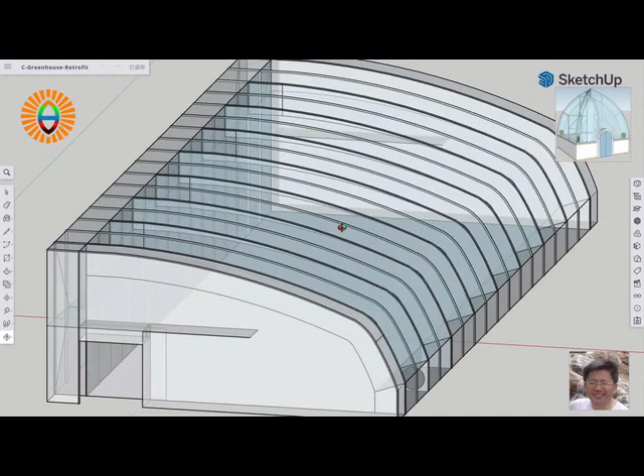So today we are presenting a retrofit. This is a design we don't want to do, but because of something that happened, we see the need to do it. Anyways, by looking at this structure, you can recognize...

This resembles the so-called Chinese style passive solar house. This is simply a profile we grabbed from a video, to demonstrate how, if this is an existing Chinese greenhouse, to retrofit it—how to use the exact same structure, and then incorporate the solar roof technology into this structure. So that's what I'm going to do today.

Before I can explain how the whole thing works, I'd like to go to a website to show how the whole thing started. It started when I'm using this one, because I haven't made the English page for this project yet.

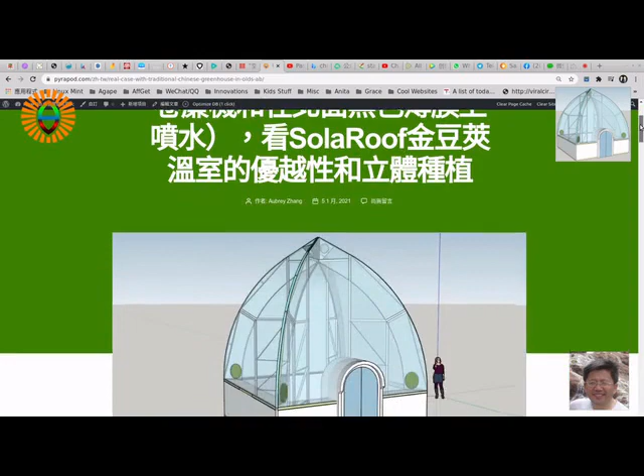Basically, this is a case study studying two cases. One is from this guy, this gentleman, his name is Dong Jianyi.

He set up a greenhouse in Olds, where he lived. He has apparently a farm there, and he set it up and started to produce lots of vegetables and sell vegetables in Calgary. By the way, I came from Calgary, I lived there more than 20 years, so I know Calgary's weather has lots of sunshine.

In Canada that's called sunshine Alberta—lots of sunshine, but very cold in winter. So basically he explained how to grow vegetables in Alberta, very cold, could be minus 35. He explained how he started. So this is the video, okay?

So anyway, someone found out what I'm doing with the greenhouse, and they said, hey, someone else already did it, right? It's working, he's selling his produce.

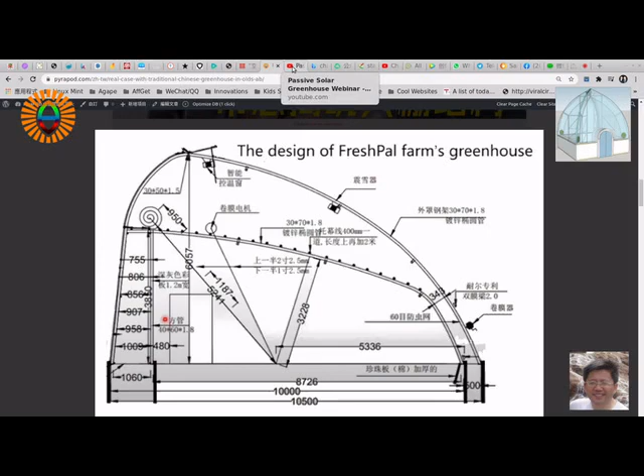But before I get into the actual retrofitting design, I'd like to explain and show the performance - how his greenhouse performs in comparison with the PyraPOD and SolaRoof design. For that I'd like to go back to his video, and we simply go to this.

Okay, for this reason, we simply go to his video and show the temperature profile, to see his greenhouse performance. This is very good, very clear, and apparently he recorded at least 3 times a day - one early in the morning, then one in the middle of the day.

Roughly, I think it's 2 o'clock, and then after sunset. So basically, for each day there's at least 3 data points - 3 temperatures. The blue one shows the outside temperature, jumping around. And the orange, red shows the interior temperature - temperature inside the greenhouse.

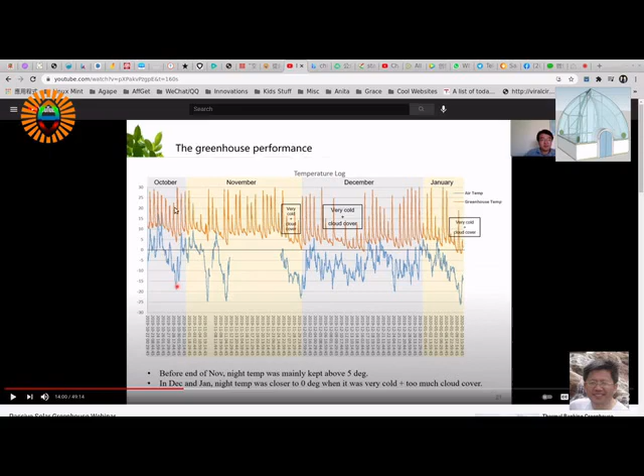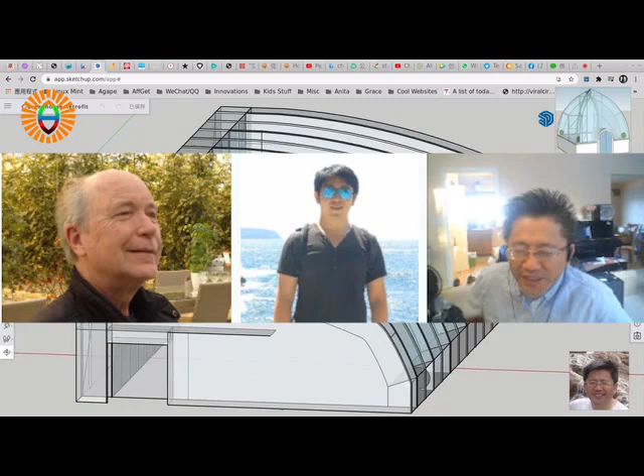How can we, taking the structure, this is the structure, right, that we the Chinese use? Or some people here import it from China, they get the structure, and then they build the rest themselves, or even get the covering.

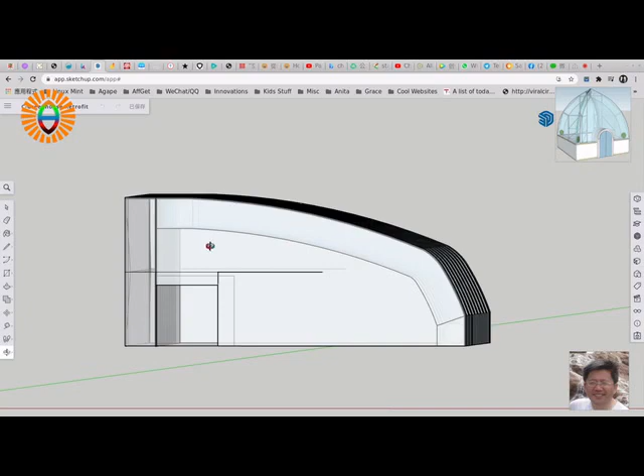But what we're showing is, based on the structure, in a case when the existing covering fabric deteriorates and you want to replace it, you have to remove the whole thing. That's the moment you should consider using the backbone, and that's simply the best moment to incorporate our design into the structure.

I'll quickly explain how it works. Actually, very simple, very simple. If you truly understand how it works, then you'll be amazed at how come nobody's doing this, or nobody's showing how to do this.

So basically, we divide the whole greenhouse structure into two sections. One is the arc, the south-facing arc, like this type of profile - this is one section, we call it the south-facing panel. And then the rest is another section.

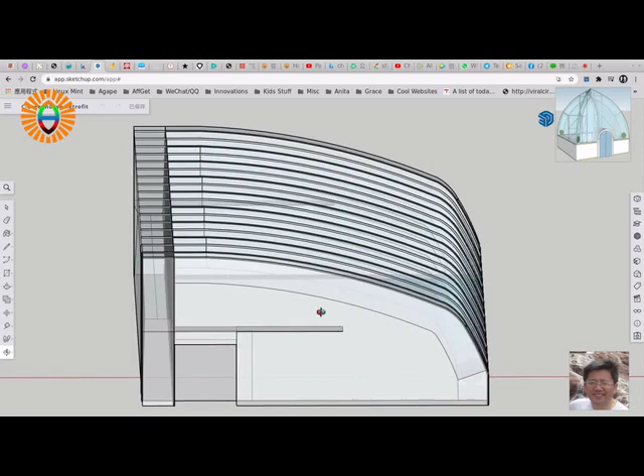For the rest, this is the north wall, this is the west wall, and the other side is the east. In this design, we make the door on the west side. You can change it - you can put it on the other side, or put two doors. That's okay, but in this design we only show one.

The fans, the bubble production, just from one section, just from this place, is enough to make enough bubbles to push around and fill the entire three-side section - the envelope. As you can see, the holes for the fan are here, so the fan will be on the right hand side, and they blow air inside.

This is simply like a duct, a channel, and then it creates a pressurized space. And then we see this screen - this could actually be the entire surface of this slope. It could be a screen, or you can drill some holes - one, two, three, four, or three, or four.

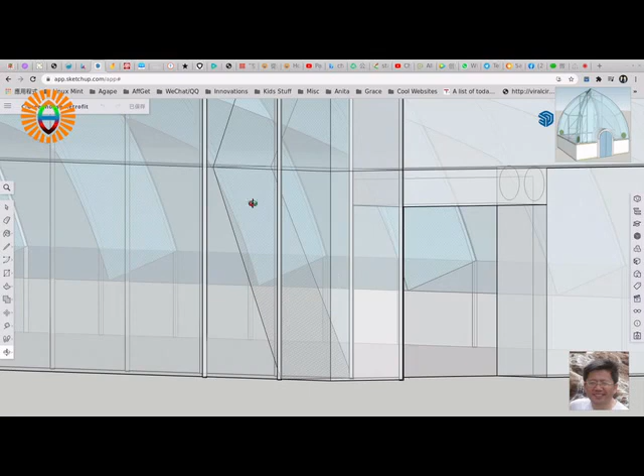That's the detail. And then you simply place the sprayer over the top, and spray the soap liquid solution to cover the screen. Because this is a pressurized space, the air will push it out, creating the bubbles. So the bubble blowing takes place on this plane.

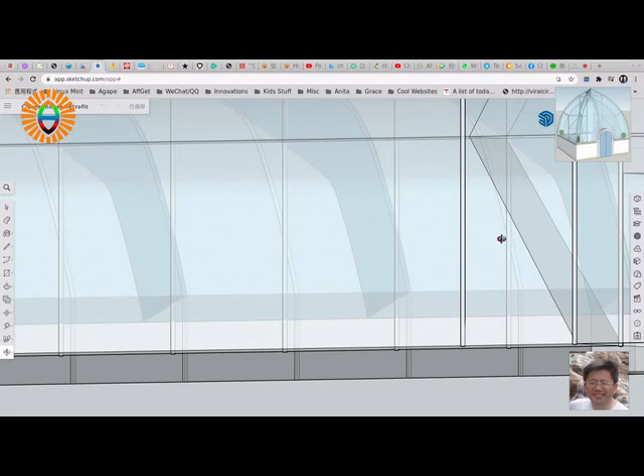So the bubbles are produced here, and fill this area first, and then the air continues to blow in, blowing lots of bubbles in here, so it pushes the bubbles this way. The bubble will flow along the north wall, the lower part of the north wall.

So the bubble will push along the way, going this way, around the corner, and then fill this part to a point. Then there's no way to go, or there's only one way to go, up. So it's better to let the bubble go this way and then push up.

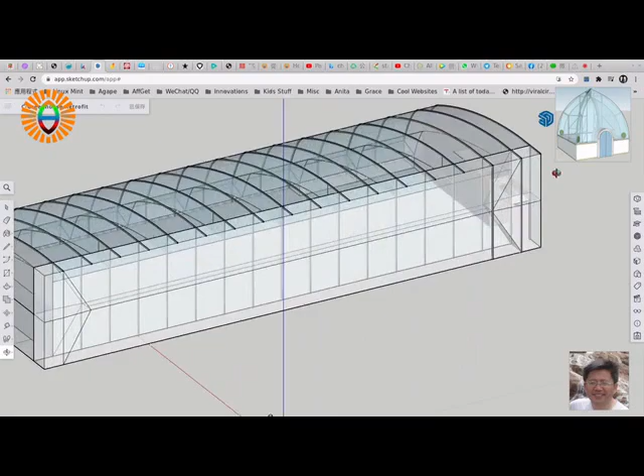And then continue to fill, it's all filled, and continue to go around the corner, coming back along the north side wall, and then go around the corner, same thing. The screen is here, the lower part, and this is the air, so the bubble will continue to push and fill this area.

There's no way to go, and they gather together here, and here there's still no way to go because the air is drawing through. So the bubble will go through the fan. Okay, this is the magic point.

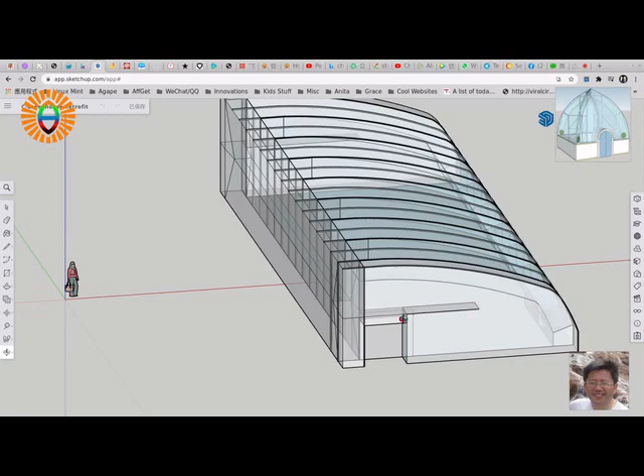This is the point where the bubbles are crushed, broken into air by the fan. So because there's no liquid spraying here, the spraying is happening there. So simply bubbles - when the bubble goes through the fan it will break it up, so the liquid and air separate, and that completes the cycle.

So this is the place where there will be some liquid gathering, and this is the place too. We're gonna give you the detail - the soap liquid tank, the small tank can be here, and also liquid accumulation. But this should actually be insulated because this is the air part. Anyway, that's just to give you a general idea.

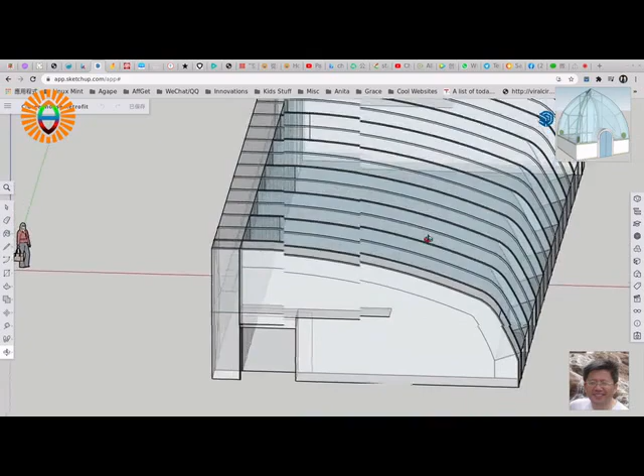So simply by design, using the existing structure, build a wall 1 meter apart. The distance is 1 meter, just to make it simple. You know, this is a big gap - you can even walk through it. So by creating this huge thick blanket filled with bubbles, we can easily create the highest insulation for your greenhouse, wrapping around it.

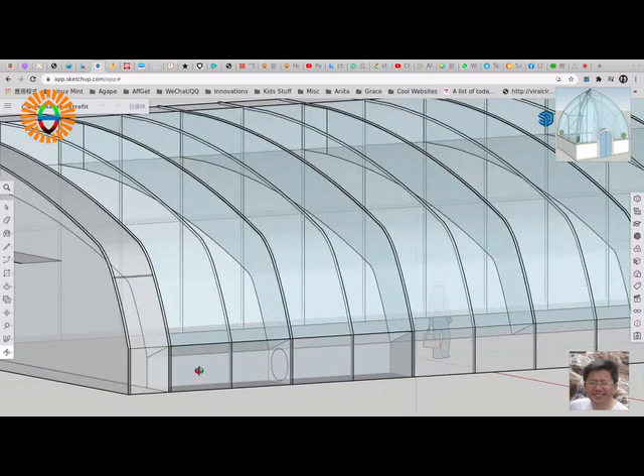And then we create a bag thing, hanging from the top, and there's a path - this is a great wide duct, basically a channel, totally empty. And so in this case, the fan will be here on the right hand side and blow air into this region, and in this region we simply use this area as the screen.

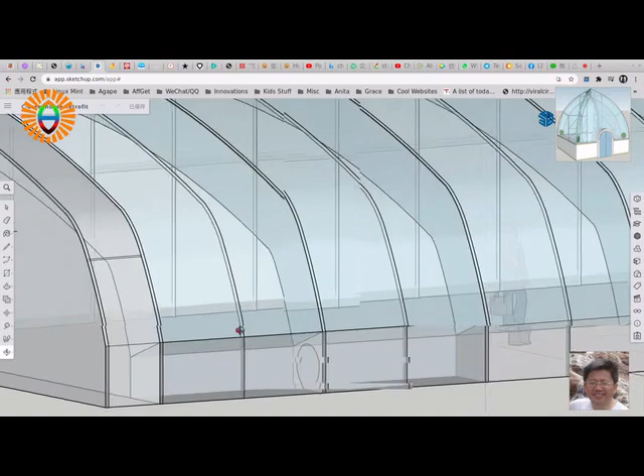We use reticulated foam to cover this, making it the screen, and the sprayer will be at the bottom spraying to the top. You can drill holes or use the whole area, as long as you make sure the soap liquid spray covers the entire surface - that's fine. And then you can blow bubbles, so we can imagine a lot of bubbles will be produced here, and the air will blow them up.

More bubbles are created, then they squeeze up, and when they reach the top, they fill the entire area. Remember, I showed in the video that it's very sticky - when you make the small bubbles, they are very sticky to each other. So there's nowhere to go but sideways. There's a hole here, a square hole, and it goes sideways and fills this area.

And the liquid, some will turn back to liquid and fall down, but the bubbles won't fall down because they're sticky. They will just come down slowly like a snake, pushing down and then down to here. And when there's nowhere to go, and the fan keeps pulling air, the bubbles will go through - at the moment when the bubbles go through the fan, that's the moment you fill the entire cavity, both sections, completely filled.

So this is how it works. Then it circulates - if you don't stop the fan and the spray, then the whole process keeps going. So you see some movement by the air. That's how it is.

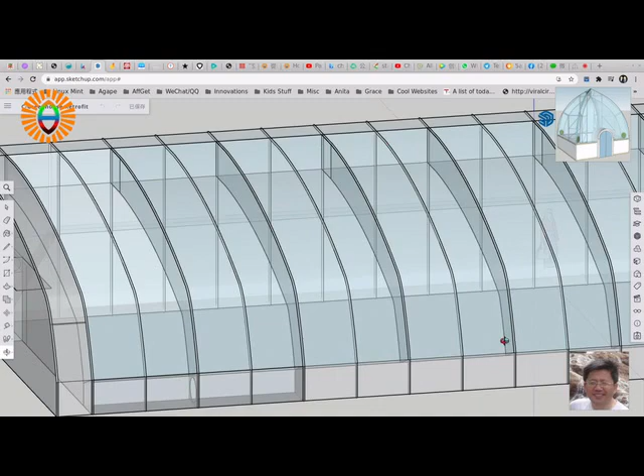And the same thing over here - we couldn't see because this is actually a knee wall. This should be in dark color actually. But anyway, the same thing happens here, just another fan, producing bubbles from here and pushing up through the hole, and going down. Same here - so it keeps going. In this case, let's see.

In this case, we have one counting pairs, right? One pair, 1, 2, 3, 4, 5, 6, 7, 8. Okay, total of 8 pairs, right? 8 pairs of channels, right? Doesn't have to be too big, right?

And it won't consume a lot of electricity, because you fill the entire cavities roughly around a few minutes only, and then you stop. Then after maybe 2 or 3 hours you need to fill again, right? So the actual time depends on how you make everything, so you can judge on site how many hours you need to refill, right?

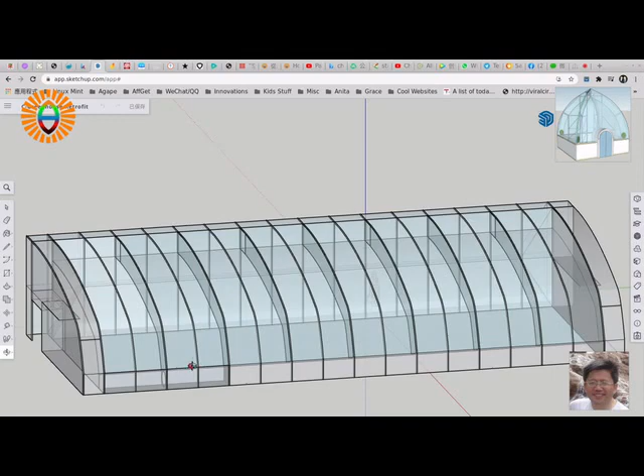So you see the fan and the pump only work for a few minutes, and then it stops. Then everything, the bubble stays there and does its magic work, to insulate the whole structure, right? So that's how it works.

And obviously in summertime there's other choices, right? If you want more sunshine coming in, for example in wintertime, you don't fill with bubbles. So when you don't fill the bubbles, the entire structure is transparent, right? And in summertime, when you see the sun going this way, very steep, and you need shade, then you fill with bubble to create shade, but it won't stop the sunlight coming in, so you still get full sunlight for growth, right?

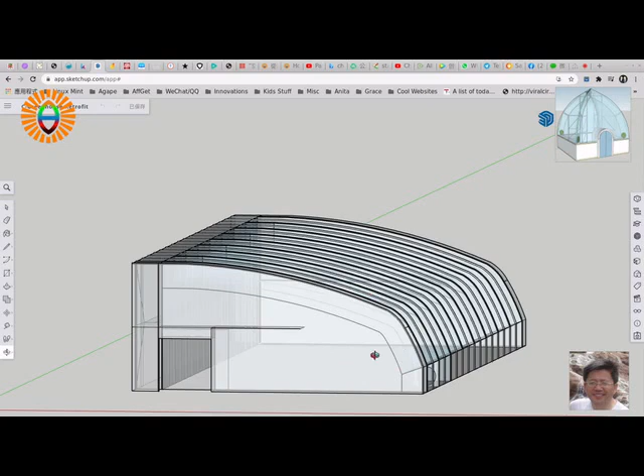But you transfer the red light, the solar thermal energy, into heat form, and store it in the liquid tank, right? So this is how you collect solar thermal energy, store it in the liquid soap tank, and then when night time comes, you simply fill the entire envelope with bubbles to stop the heat from escaping, right? So whatever heat you gather, you capture during the day, then you can use it during the night, and for that reason you don't need actual heating, right?

So this shows that this is better than passive solar. This is actually proactive solar, because we have the bubbles, moving bubbles, dynamic bubbles, when you need it, you create them, right? When you don't need them, you simply destroy them, simply by not spraying, by letting the bubbles going through the fan, and then you break the whole bubbles, right?

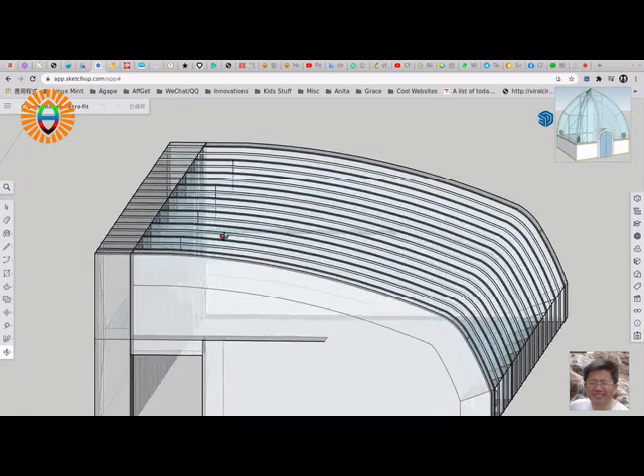And then you can turn the entire structure transparent. That's how it is. So I'm sure that once you understand this, when you see how it works, you know, right? This is so simple. This is bloody simple.

If you can't still understand this, that means you need to really think, right? You need to ask questions, right? And we like to help, and as we said before, we encourage DIY, right? If you truly understand what it is, I encourage you to build it yourself, without paying us, right?

This is why we do this. We just want the whole world to know about this technology. We want those who are handy to build it themselves, right, and then benefit themselves, right? But if you're not handy, and you want someone else to build it, you can hire someone to build it, or you can order a product from us, right?

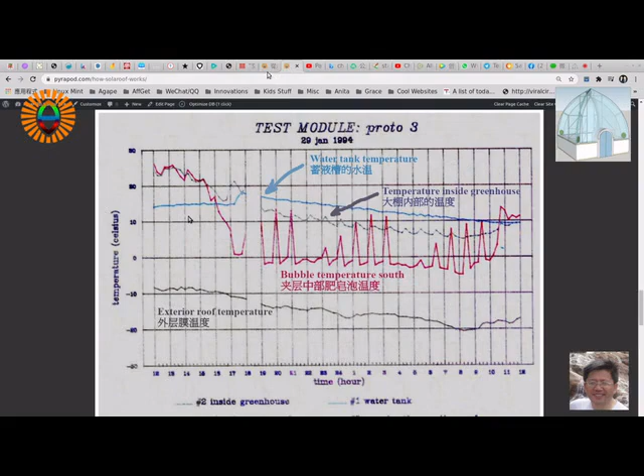Yeah, so anyway, we can show how we do it. By the way, for our own, we also have this type of structure design, right? This looks nicer, and also smaller, right? And it also fits a backyard easily. This is the one we promote.

But if you have an existing Chinese-style greenhouse and want to do some retrofitting, you can refer to this design. Okay, so anyway, hope you like it, and hope you understand. This video will help you understand how it is. And if you still don't understand, ask questions.

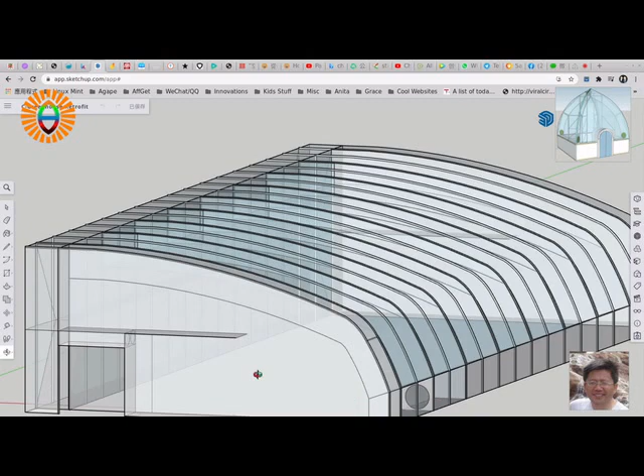Once China adopts this, they can retrofit existing greenhouses and stop producing energy-inefficient ones. That will do great work for the whole environment, because this is the cheapest and most efficient way to use free solar energy. You just need a little bit of electricity—even a few solar panels can produce enough electricity to power the fan and the pump.

That's why we like it so much, and we don't hide anything. We open it up and make it transparent. It is simple—bloody simple. So if you still cannot see how it works, you need to think about it and truly ask questions. I'm sure if you truly understand how it is, most people can do it. If you still cannot, we have the product, we have the full line design, and we have this demonstrated. I think that's enough for handy people to start from here.

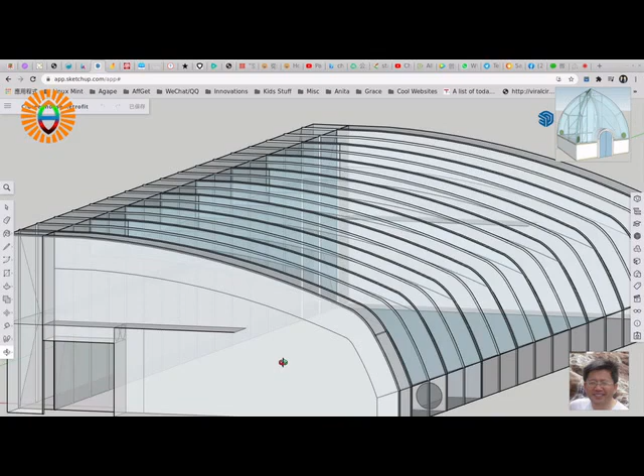Next phase we're going to build and manufacture this one, and set it up in my backyard to demonstrate it's working. At that time I'm going to set up the same thing and measure 4 temperatures, show how the plant is growing. I'm doing aquaponics and sandponics, so I'll show how the fish is doing, so everybody can see. That's our way to demonstrate it truly works, and it's so bloody simple.

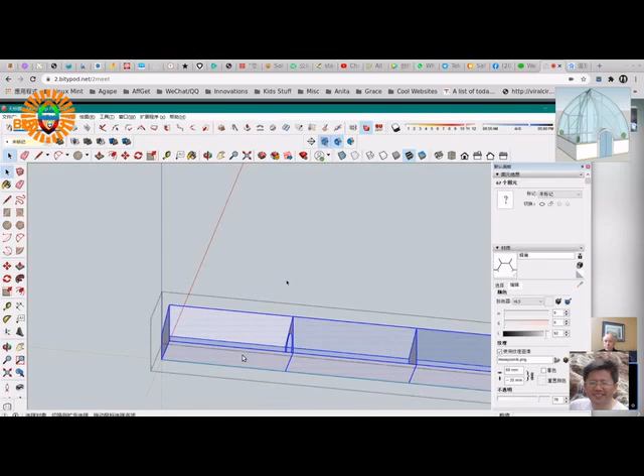So that's it. Meiji, show a screen on the left hand side, and this side, the right hand side is open. And then the other is a hole, and then we can just stop here, and I can make a simple video explaining it. You can do that. I forgot recording—right now I'm recording.

Can we put the door on the east or west side? This side, same thing—you could put it on the north, or the east or west side. The idea is you put the door right there, and bubbles can flow away from the door. Same—then we don't have to worry about that, they're straight.

And this side, what do we do here? So here's how it goes—they flow, so there's a doorway. We put it right in the corner, so we put the doorway right against the corner, 2.5 meters high.

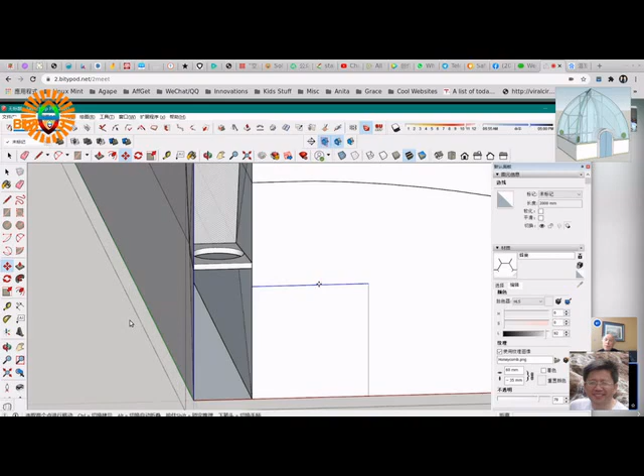And we can make it wide, just in case—make it wide. The farmer wants a wide door. So we make it 3 meters wide, 2.5 meters high and 3 meters wide, or at least 2.5 meters wide.

So now the bubbles can go, as you see, over the top of the doorway—the flow of the bubbles can come around, they don't have to interrupt the pathway, and it's a 1 meter wide cavity. It goes, and the bubbles continue flowing over the door, 1 meter deep. Really deep, 2.5 meters deep, 1 to 1.5 meters. This is really insulated—it's 1.5 meters deep and wide, and 2.5 meters deep, and it's flowing.

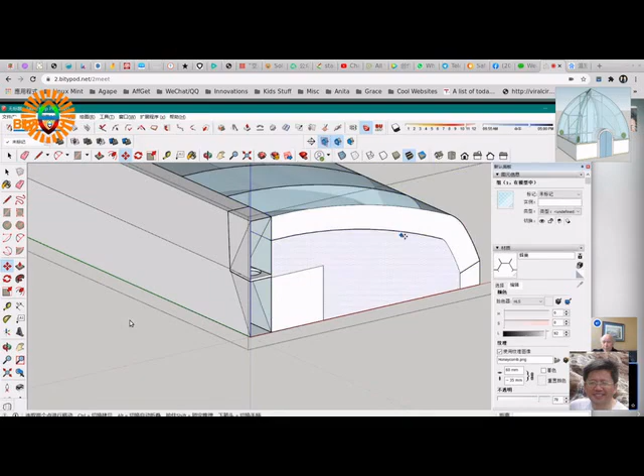And then the partition has to be designed. The middle fabric is also holding the bubbles in the top area. The middle fabric holds the bubbles in the top until we end, and then they drop into the bottom.

Right, they drop from the top into the bottom part. Somewhere along this wall, we stop. So try to think of the bubble cavity now as one big space. Remember how we did the north wall? We look at it as one big rectangle at first. So you make a big cavity on the end wall here that's 1.5 meters wide.

Just look at it from the end wall side kind of thing. And the bubbles are flowing into that cavity. Think of it as just a big empty cavity space. It's covered with the fabric material on both faces, the outside face and the inside face.

So actually, we need to make an add-on section. That's what I'm saying, that's right. We need to add like 1.5, or 1 meter. So this is 1 meter. Then we can still keep everything the same. Okay, let's do that.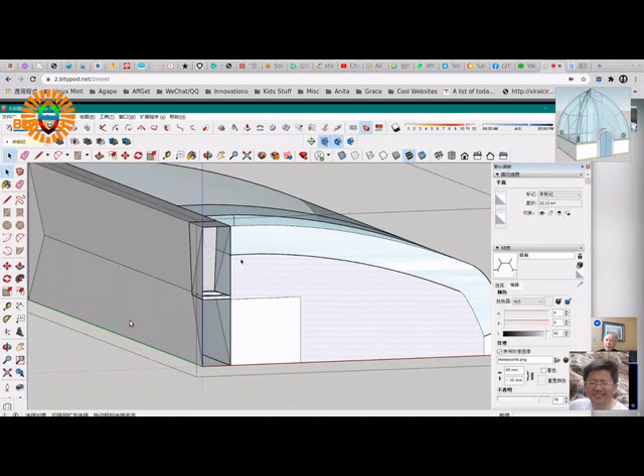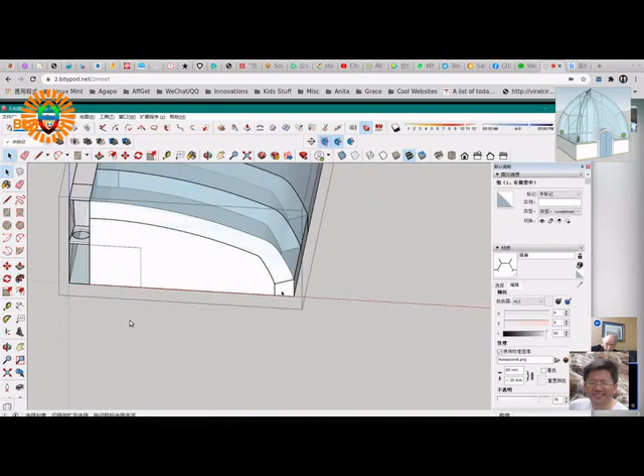Let's not go with the regular spacing of 1.5 meters, let's go with just 1 meter. But it's like a double arch at the end wall. Only 1 meter spacing, the other ones are 1.5 meters. One is going to be a second set of the metal arching at 1 meter spacing, and the outside's covered with fabric, the inside covered with fabric.

Between we have a cavity, right? And again, it's the same kind of thing. We want to create an upper cavity and a lower cavity. So we add another partition. Remember before it was 1 meter wide? The partition, 1 meter. And it is theoretically 1 meter, because we zipper it, so it comes back to the 1 meter.

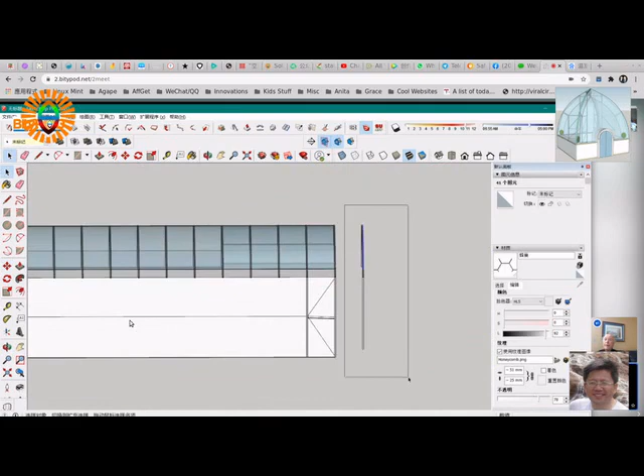Post tension, it's not something that's noticeable, except out in the span of the fabrics. When you're close to the framing, it's 1 meter, it's when you're away from the frame support that it changes. So the door is a doorway now. Yes it is, it's a portal. Through the bubble cavity.

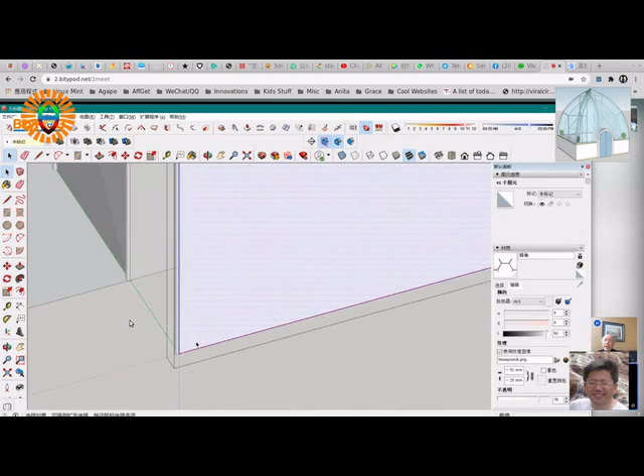So what we did for the Fairfield one, we used the door. So let's say if the door was actually only 2 meters high, we use the 0.5 meter as a channel for the bubbles to flow in the lower cavity, but over the top of the door. So the flow at the top of the cavity is smooth, it just turns the corner, it's coming down the north wall.

So Young, when do you have to go? It's at 10:10 now, or 10:30. Okay, well we'll just do the rough idea.

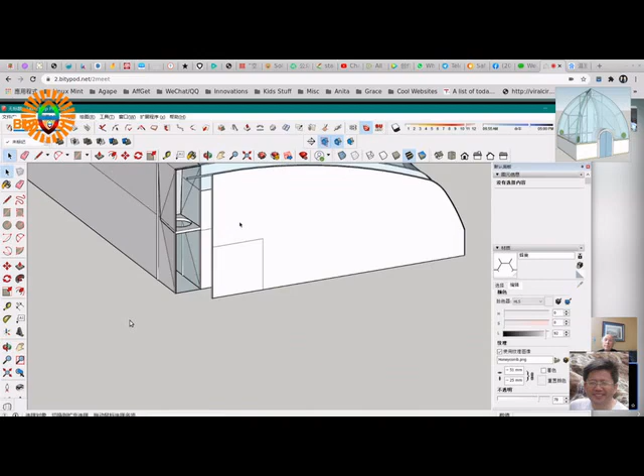So when the fan is sucking the bubbles, there's an important factor. Over the top of the door, let's make a channel. We've got that middle partition, right? The middle partition is still there.

So extend that around the corner, take that middle partition and bring it around the corner and into the end wall. So it's going across, making the upper portion and lower portion. That's the divider. So we break it around there where we won't go right to the end, of course. We break that somewhere in the middle of the south wall, the end wall.

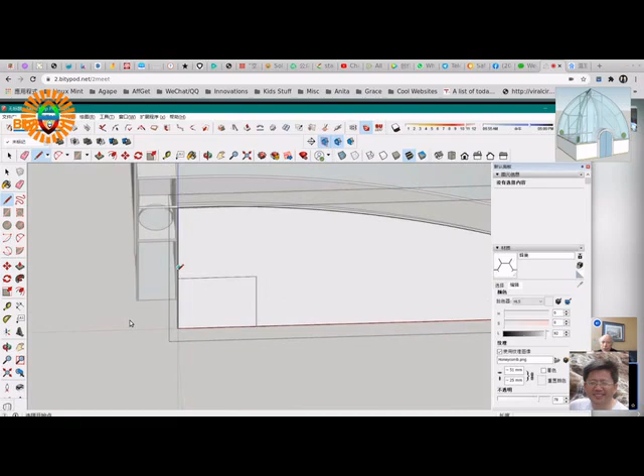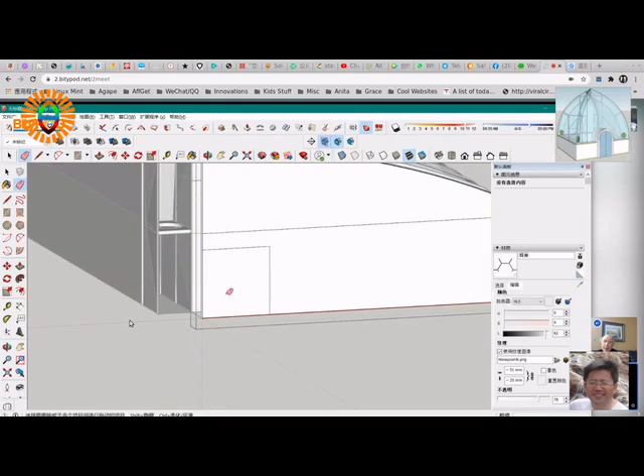That sheet's coming across there, and we stop it somewhere around there. Yeah, that's it, that's the line. So we take that and we actually extend it across, towards where the arches start to come down. So we're kind of compressing the shape.

The question is, where do we stop that sheet? We can stop it anywhere, actually. As soon as we stop that sheet, the bubbles fall. The bubbles are up at the top, and as soon as we stop the sheet, the bubbles will fall into the bottom. And because it's a U-turn, they're going to press into the turn.

So I would pull that back quite a good ways, I would let them fall fairly soon. So let's say we make that sheet, extend it out, see how wide the door is, like 2 or 3 times the length.

No, you don't break it there. That's continuous all the way around the corner. The right-hand side, that's where we stop it. We'll pull that back, give more room - meters, like 3 meters, 4 meters, 5 meters. Push it back.

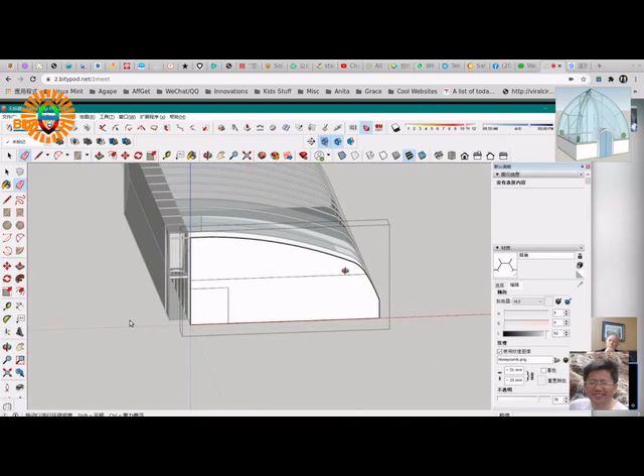Push where? Yeah, that one. Pull it back towards there. Take it back. As soon as we stop that, the bubbles will fall, right? So pull it, let's stop it way back, far from the end. Right now it's going all the way - take more. More. Somewhere around there.

We stop that sheet, right? That sheet that's connecting to the inside sheet, that's getting a top cavity and a bottom cavity. So we stop it about there.

What are the bubbles going to do? They're going to fall, right? But they're going to push - they continue to push. And they will fill in, and then they'll start to flow towards the bubble machine, towards the door, and then the bubble machine.

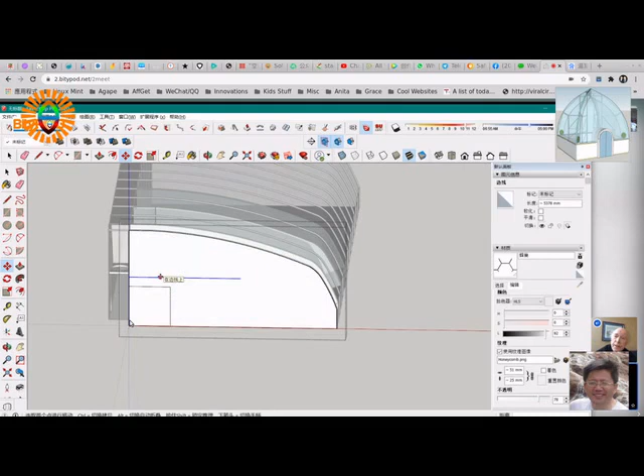And what we did is we put the fan on top of the door. If you have a portal for the doorway, and you have the sheet there - so we got 2 sheets. We got a sheet across the top of the doorway, and we got this other sheet, the partition sheet, the main sheet, that separates the top and bottom. So what you've got is a duct in between them now - you created a duct between the top of the door and that sheet.

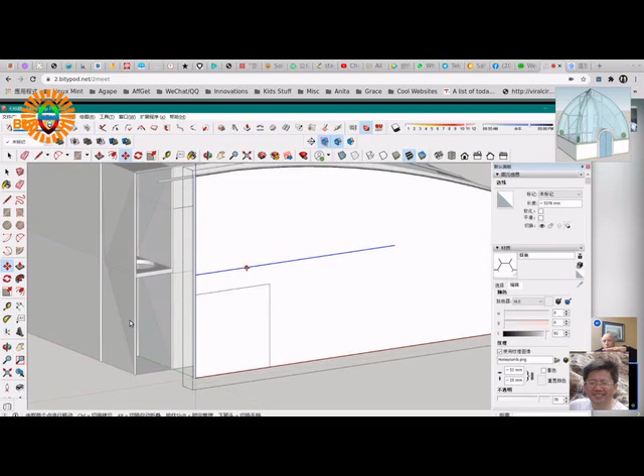1 meter by what? So we draw a round hole there. Well, that's where - look at, the bubbles no longer exist in this space.

So you mean here? Yeah, there. Yeah, that's empty space now. That becomes empty because we're going to kill the bubbles as we pull them in there.

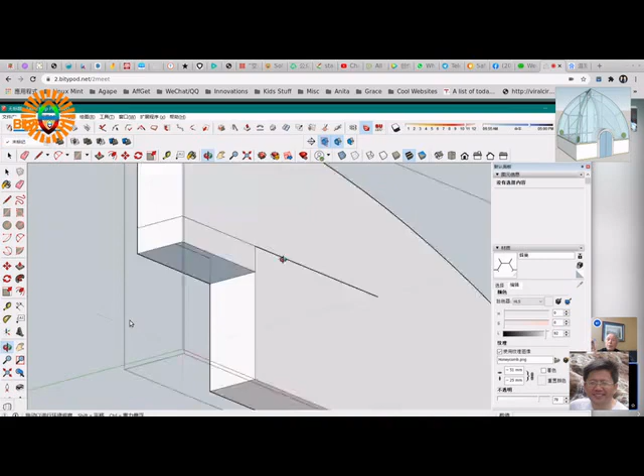So we're going to have the bubble panel, what I call the fan panel, right? Where the bubble machine is, where the fans are. So the panel now is right there beside the top of the door - not over top of the door, but right beside it. So make the end of that duct over top of the door. Yes, there, that's where the panel is - that's the fan panel. The fan is there.

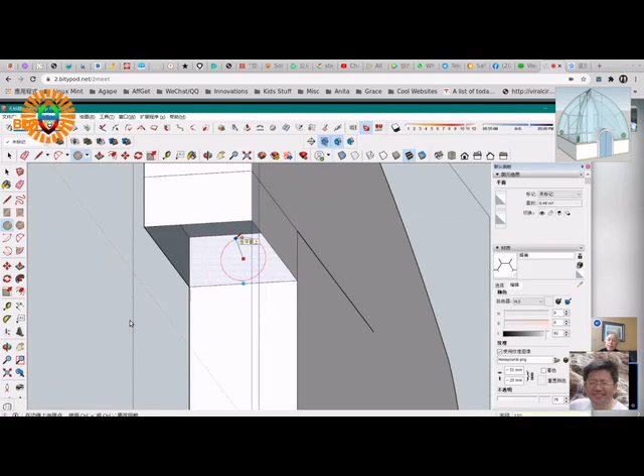And through that hole - yeah, we're going to pull the bubbles into that duct with the fan. And because we have a limited space, maybe two fans? So we might have two fan units.

Two fans side by side, two fan units, powerful wheel fan units - those ones with the wheel. Two of those, and they can do the bubble generating easily, right? Easily they can manage.

So they pull the bubbles in. So you can see we're pulling from the top of the bottom cavity, right? So the bubbles will come right up to the top there, and the air, the last bit of air, will go in when we're making bubbles.

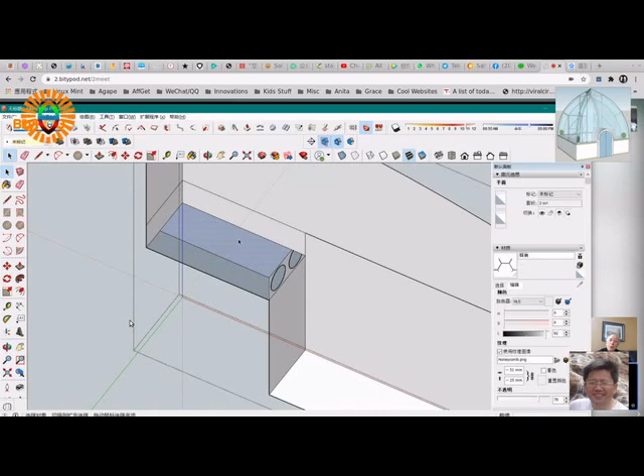And on the opposite side, we have a bubble screen. No, that's the top of the door - opposite, on the other side of the door, in the north wall. There, yeah, that's the screen.

But that might not be enough screen, so what we do is a kind of plenum for the air to get more screen area. It's kind of just beside the doorway, like a plenum where we get more screen area available, because that's cavity space over there beside the door. It's filled with bubbles, except where we have the screen. So what I'm saying is we can create a space where we have more screen area if we want.

And don't forget, it's filling the bottom cavity - all the bubbles we're making will fall downward and go downward first, filling in the bottom. Can't go above, because there's that barrier - the tie, the fabric, the partition. So let's say that's enough screen area for now, okay? But I don't think it is - we'll figure that out later, so it doesn't matter. The bubbles, as you see, will go into the bottom cavity.

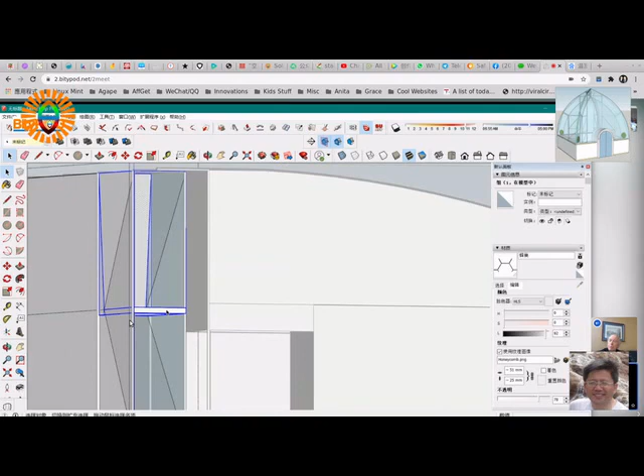Right, flowing at the bottom. We take away the bubble machine where we had it before. All of that now, we take it away. But in some cases, that design might still be valid for some situation. But now we have a different design for the bubble machine.

But the tension still works the same way, it's still there. So see that angle that we have? I have a feeling that the angle, see the angle of the skin.

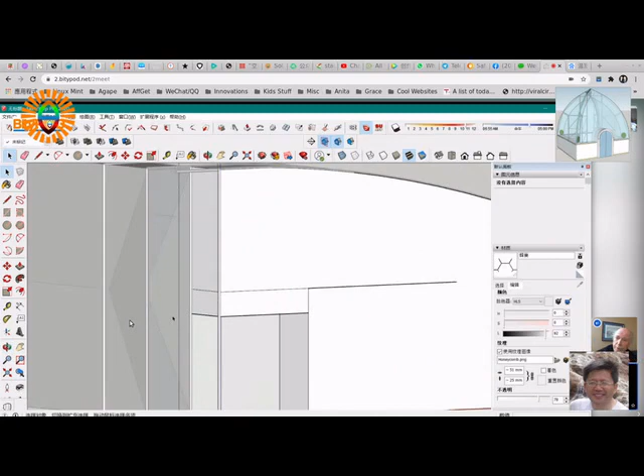Don't extrude that, we need to pull that out, right? That's just empty space, where the air can come out. And we know the air is going to exit there, from over top of the door, but it's going to exit into a plenum, what I call a plenum, which is a pressurized space.

Let's look at the end wall and the shape of the fabric there. See the shape of that fabric? See that angle, that hip roof? At the bottom, that could be where the screen is.

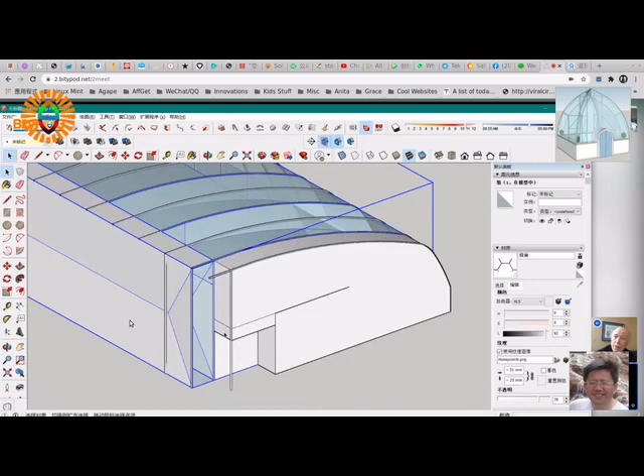You see, what we're doing is we're pressurizing the space, and we're providing a screen that the air can get through. So let's draw a sheet of material on that slope. See the slope? Inside this area, that whole slope area is a screen, or what we call the screen. What do we call it? The fan.

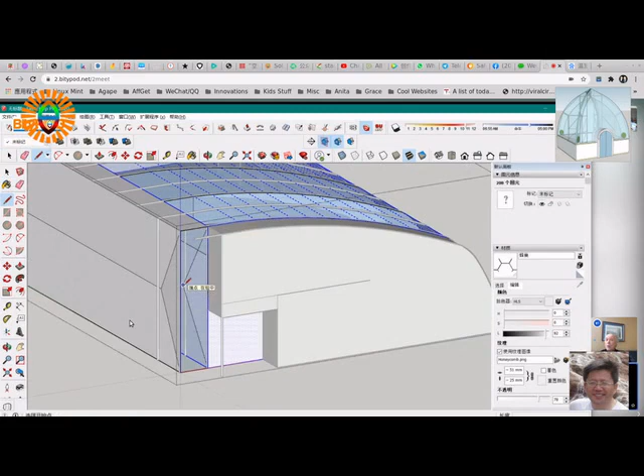Anyway, so it's not necessarily all porous, right? There's areas of that surface that will be porous, and we'll position nozzles to shoot on that surface area. So there could be a big oval area here, or a square area, or two circles, or multiple circles. Multiple circles are better, right? Just for cone circles and sprayer nozzle. So if we have 3 circles or 2 circles, maybe 2 circles is enough.

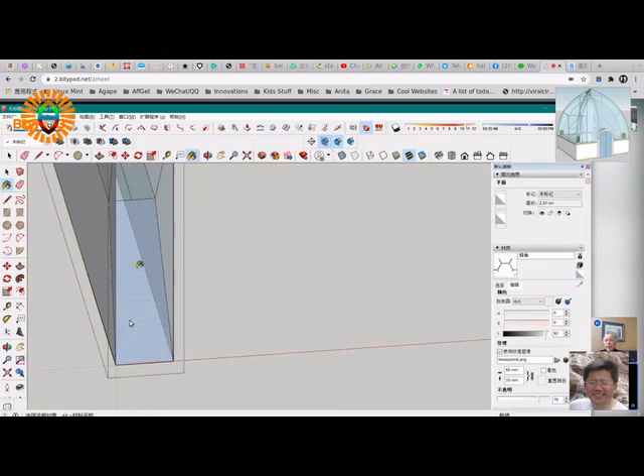2 big circles, because it's pretty big, it's a meter. Anyway, whatever, we have a nozzle shooting on the screen, covering it with droplets. And the bubbles will push along the lower cavity space.

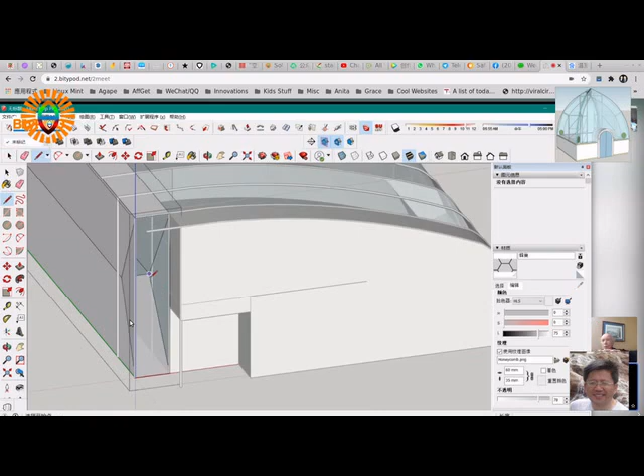And remember, there is that partition, which we can see at the top of the screen, the screen panel. So we can talk about this as a screen panel, because it's not all screen, there's an area of screen. So at the very top of the screen panel, we have the extension of that horizontal sheet, it goes around the corner, and then they stop.

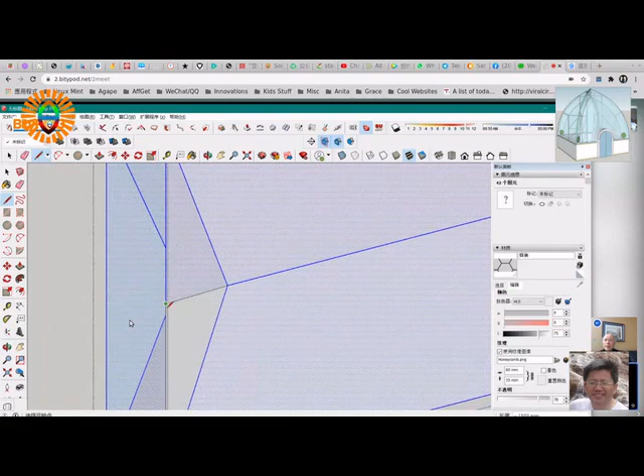It is the partition, so the bubbles or the air cannot escape from this plenum. The pressurized plenum, the air can only go out through the screen area, so that's continuous and pressure tight. So the zipper, if we have one still, but probably we don't, because we don't really need a zipper there. It's just a sheet of material that is put into this area and keeps the pressure in the plenum, the bubble generating machine.

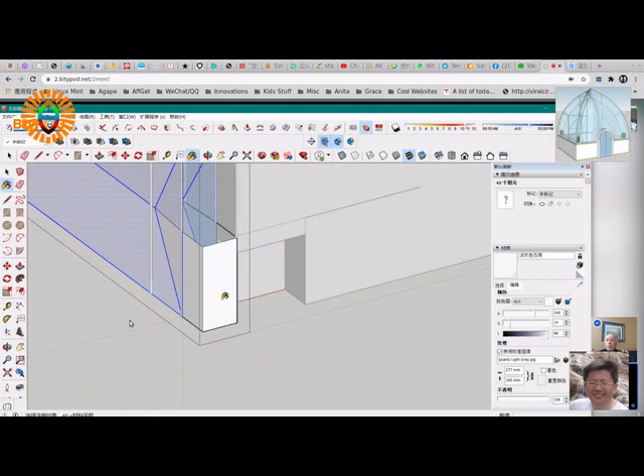So now you see that we have a door at the corner, and we'll have a corner wall system. In the corner, we're going to create an insulated wall that hides the bubble plenum behind it. So exterior to all of what we're doing right now, we build an insulated wall that covers this.

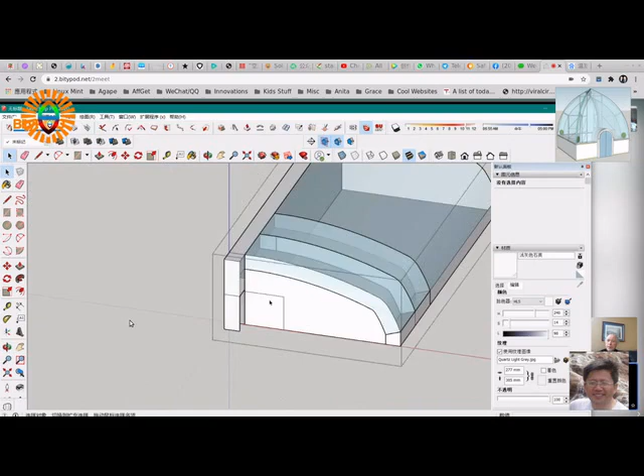So no one can see the arrangement, where's the bubble, where's the fan, where is the screen, because it's hidden in this corner construction. And we'll make the corner together with the door. And then when we service, we can go in there and do some service, because the door goes through that as well.

The portal, and over top of the door, is part of the plenum, that's a duct for the air to flow. And the air flows, being pushed in by the fan, and it's pressurizing that corner area in the lower cavity. The lower cavity space is where we're going to have the screen, so we generate the bubbles. Yep, that's it.

Oh, I got a low battery.

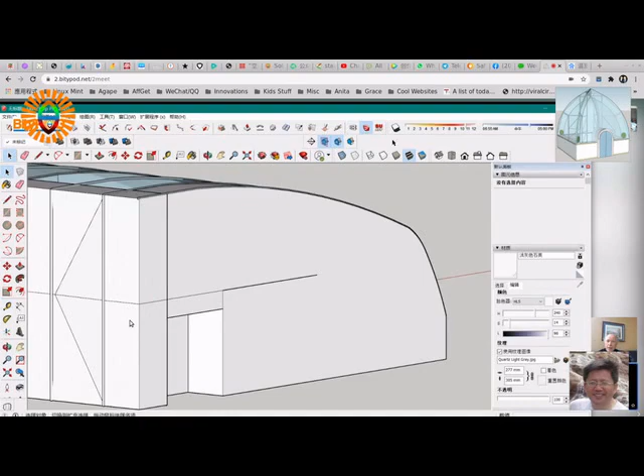We need to think about this. You know how it works - if the one bubble thing blows air, it creates a tension there. We pressurize that space. So that space is empty, right? It's not insulated because there's no bubbles in there.

So that fan could be far away, right? Yes, it can. Or maybe we can move the fans to here. It can be there, except then you're going to create more suction - that area over the top of the door will be put into real suction.

So I feel the top is where we pull the bubbles and destroy them right away, and then we're pressurizing with air. See, bubbles don't flow as well as air. So it's better to break the bubbles before they go into that duct. What we're having inside is air, not bubbles. Otherwise we're pulling bubbles and there will be resistance, pulling the bubbles into that narrow channel.

So you're saying it's better this way - the bubbles are free in the big channel to come to the fan unit, just come and flow. But if the fan is in that duct, the bubbles have to squeeze into the duct. Very hard - bubbles have resistance. Air knows no resistance, zero resistance for the air. And you also want to pressurize that space.

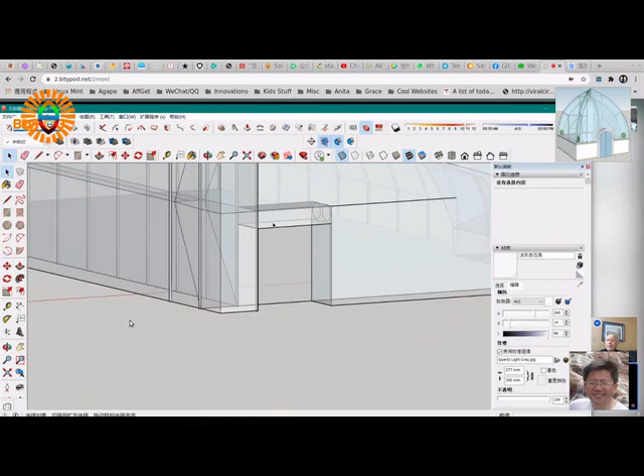So this is fine, at least this is good. Again, when you look at that Fairfield, notice that in the corners of the building, these structures we did - when you look at the video you couldn't tell, that's hard to tell. You'd say, where is the bubble machine? I can't see it. Because it's hidden behind fiberglass.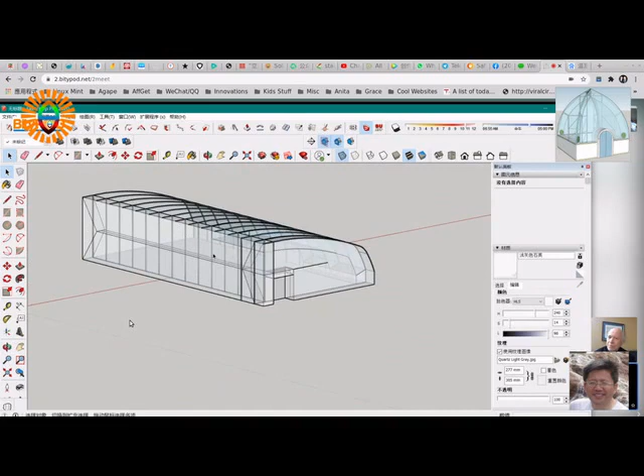No wonder - those are structures that we build. You're going to look at that and understand what that thing is - going here, going this, coming back. Wow, this is it. And we have another - what about this side? It's just a U-turn, it goes all the way around and comes back. This way, come back. Right, same thing.

If it gets too long, we can add another section - you make a break in the middle and do it toward each end. Just for this, it's just a demonstration to show the right way, so maybe just make it as a path. Just an idea, because there's no door.

No doors, so it's just two sections, same thing. And we could figure out how to do another door on this side and do another bubble machine - that would work in tandem with the other one, so they'd both push bubbles in the same direction. One would push into the bottom, and the other would push toward the top. Same idea basically.

When the bubble screen is at the top side, that's why that tower, that corner construction, went all the way to the top - because sometimes we'd need cover at the bottom, sometimes at the top. So it's a standard pushing unit there, coming back. It's a standard design for the corners of the buildings, to do the walls.

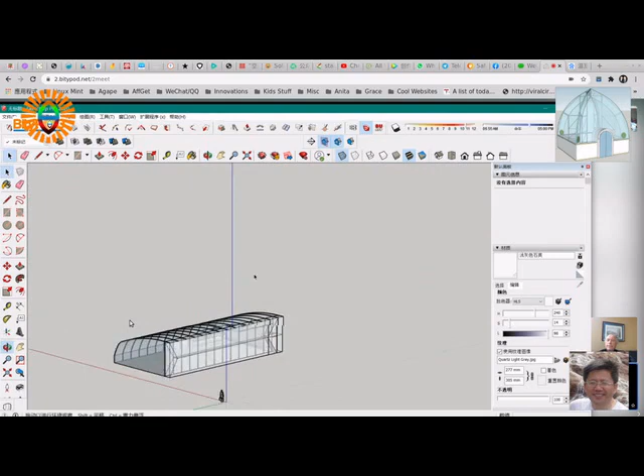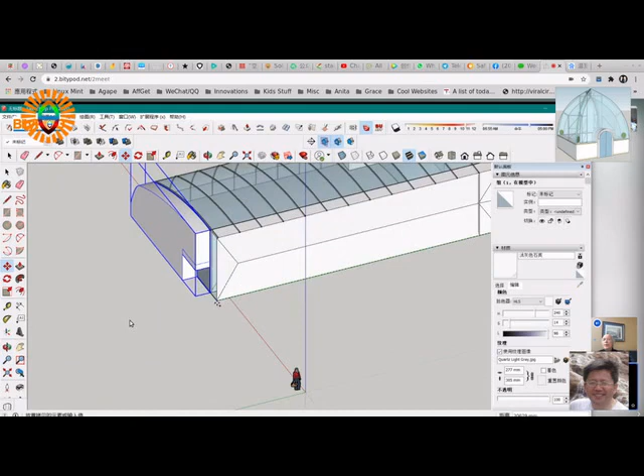But we don't have much time, maybe just show a diagram - just showing that you add a section there so the bubble comes from the bottom, going around to the other side and up, then coming to the back to the north wall, then coming back. And if we mirror this, we can do tunnels with no wall - you don't really need that high north wall, you can do a tunnel. So we just mirror this.

And we've got a south wall system and a north wall system. Bubbles on the north are fine. We don't need this idea of an opaque north wall. But this is our retrofit, for converting existing

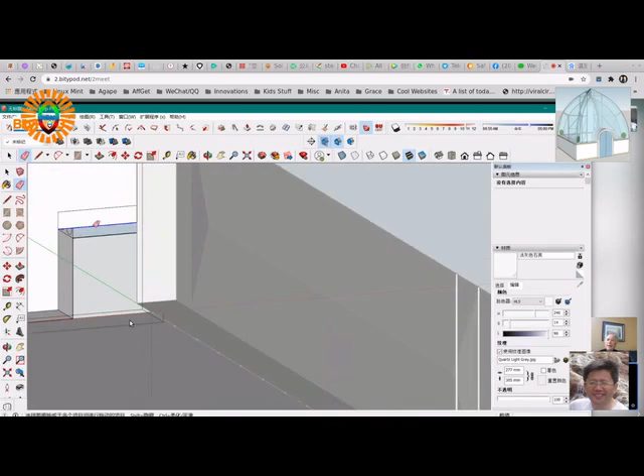greenhouse of this design. Convert them. Ooh, 2 doors. That's nice. So we just use first, maybe. Whatever. And now the screen is on the top part, and we're pressurizing towards the top because the inflow will be at the top here, somehow.

We'll work that out, but we won't do those details now. We'll work it out so that in fact here it will be generating bubbles into the top portion of the cavity.

Well, perhaps this could be a taller door. Taller door. I'm not sure, okay. It's like we're doing a lot all very fast.

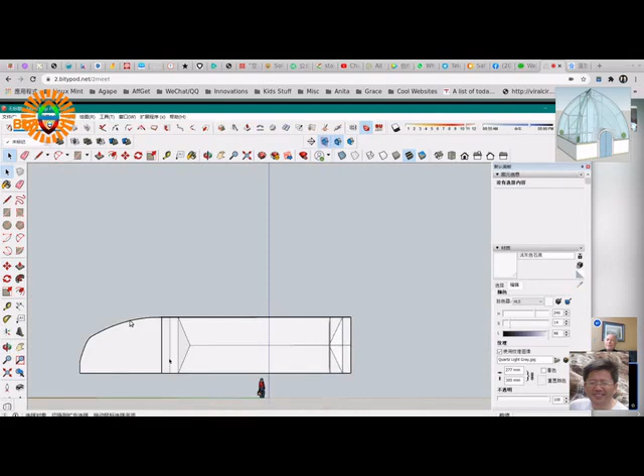Very fast. You can see that on our structures for Fairfield, we put the doors very carefully to make a really efficient flow path. For the... I see. So just look at that one again. Look at all, because isn't this great that we have that video?

Because Aubrey, you can say to people, this isn't something we imagine we can do. We have the real thing. We've done this. This is easy for us to do. And they're still using it?

Well, what happened is that because it was built a long time ago, it deteriorated—more than 20 years—they changed the cover. When they changed the cover, they put single skin on. Oh no, so they couldn't make bubbles.

Yeah, it's too old, you know. Too old. Material won't last that long. You know, the existing structure is so permanent, it's so durable.

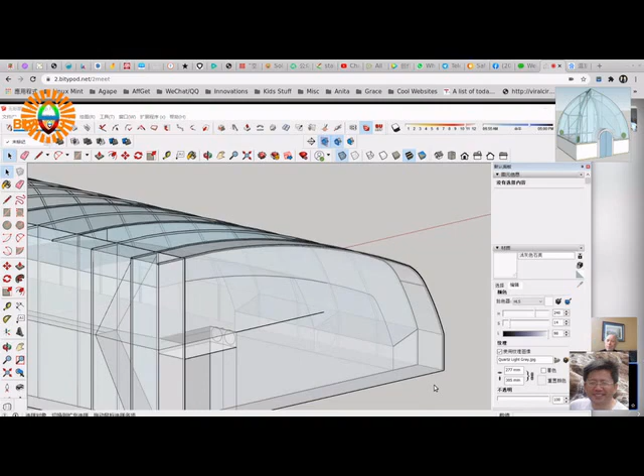We could go and put the cover system back on that structure. It worked perfectly. Okay, so a very, very little touch up, right? It's this that's over above the door.

That should be not a line, just a plane, right? Plane, and then true to right, same idea as before. That will suck in the sides, right? So it pulls them inward and makes a sort of tensioning of the skin. And it'll still work even though it's not—with this weird shape.

Wow, this is nice. All right, I will quit. You go, young. But this was a fantastic session.

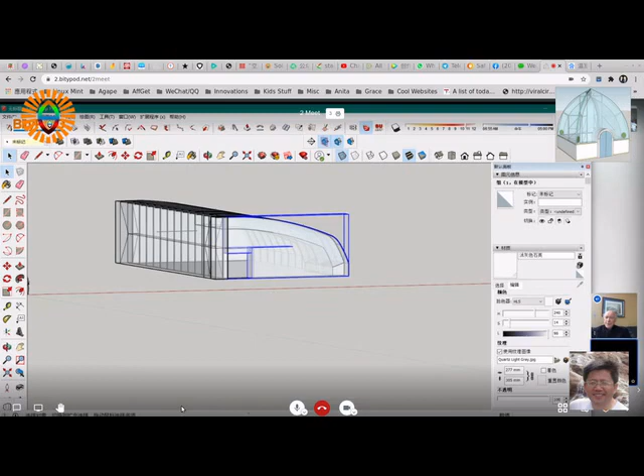Just finish a rough idea, and then I can make a video out of it. Just explain—that doesn't have to show the details.

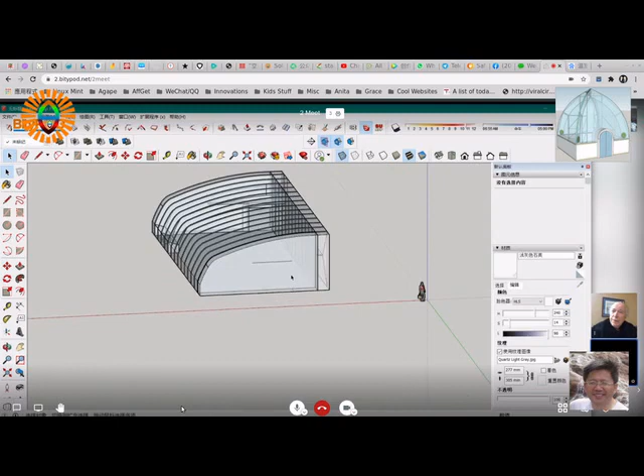Alrighty, wow, very wonderful, good, very good. So technically speaking, it can work with any shape, right? As long as you figure out your landscape, the path, the circulation. Any shape will work.

Oh, this is very, very—bubbles will go anywhere. Anywhere. And some may even, instead of retrofitting, just use the same thing.

I mean, just build a new one this way. So retrofitting is just retrofitting the existing structure, right? The other one is, they'll just build a new one this way.

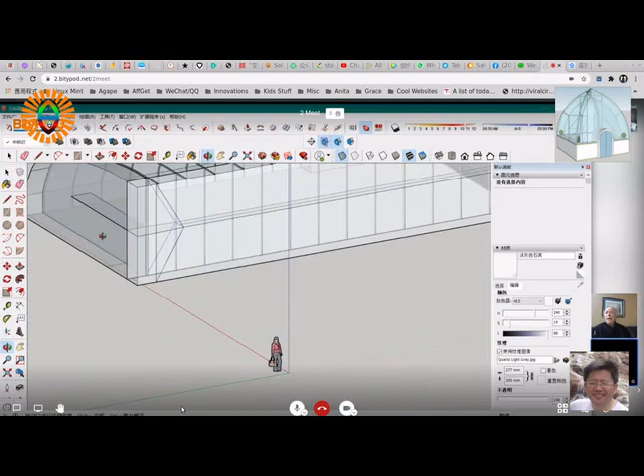Because it's in production, they can then build tunnels with a column—instead of a north wall where it is, we would have a column row. And we'd have a symmetric tunnel structure. It's very efficient, very efficient.

So roof pairs are significant, like they were working together to create the circuit, the flow path. And that also—

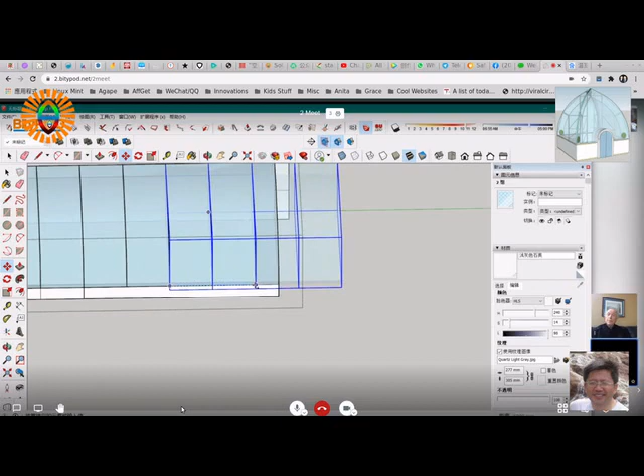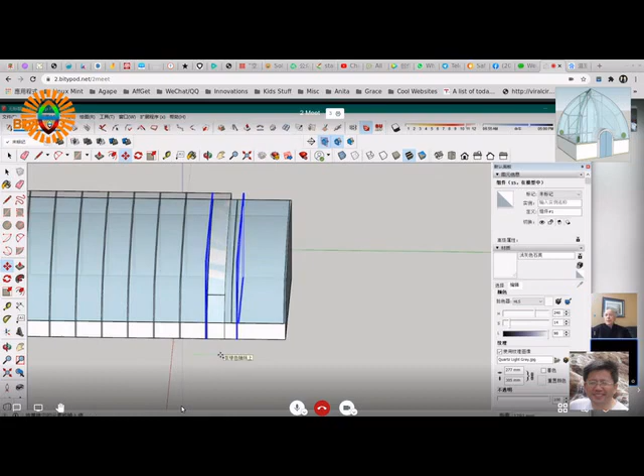is a good DIY project for those who like the Chinese greenhouse over here, but then we can give them a suggestion—even if you don't want to use our new structure, this could still work. Because people just have bias and they might think, oh no, this is the best one. So fine, use bubbles. Sure, it works, right?